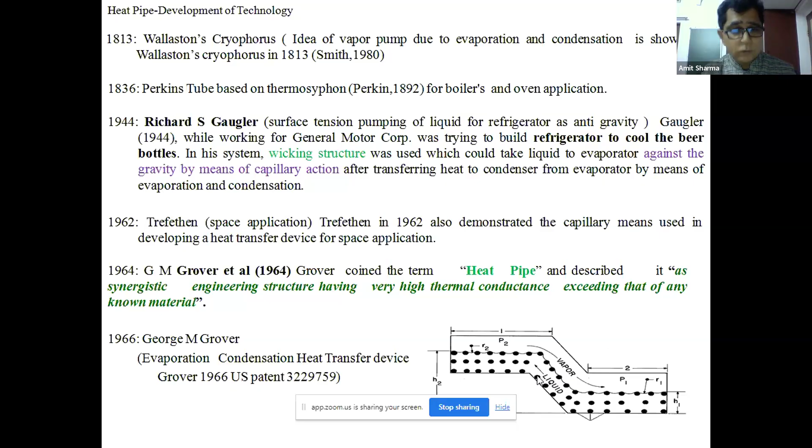So what Grover did is explore the passive nature. Why is it called passive? Because we want to transfer the heat. We all know about ACs and refrigerators. Let's take the case of a refrigerator. You cool down things in the refrigerator, your milk, cold water and perishable goods; you take out the heat. It seems that you are extracting heat from a low temperature and injecting it to a high temperature. That's not possible by itself. It is possible only when we supply external work.

What we normally do is switch on the electricity, and electricity runs the compressor. Later in the slides I'll explain these things in detail, because we talk of air conditioning of vehicles and households. So in refrigerators we are running the compressor by means of electricity. But here heat is transferred without using external work. That is why it is called passive, because an evaporation condensation technique is used, happening in a sealed container.

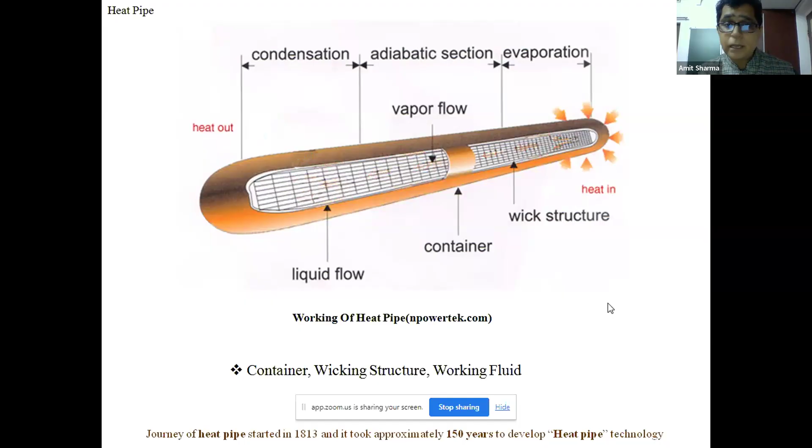So we can say that the journey of the heat pipe started in 1813, and it took approximately 150 years to develop heat pipe technology. After that, it was taken up by all the industry. The reason why is summarized in these properties. It has a large operating temperature range. Heat pipes are available of many kinds, with working fluids ranging from water to liquid metals. Liquid metals are used in nuclear power plants to transfer heat.

Then it has a large heat transfer capability with a minimum temperature gradient. Why is it so? Because heat is transferred by means of evaporation and condensation, which have a huge heat transfer coefficient, so it has almost a constant temperature. Different geometries are possible. Suppose you have a source with a circular or symmetrical shape; you just change the shape of the evaporator to match the source, so different geometries are possible.

Thermal diode: it only allows heat in one direction. The biggest example is the thermosiphon. You transfer the heat from one end to the other, and the liquid goes back to the initial state by means of gravity. So if you reverse it, it won't work. So it's a kind of thermal diode. It's a passive element, so no external work is required, no moving parts, maintenance free, with long life and flexibility in construction.

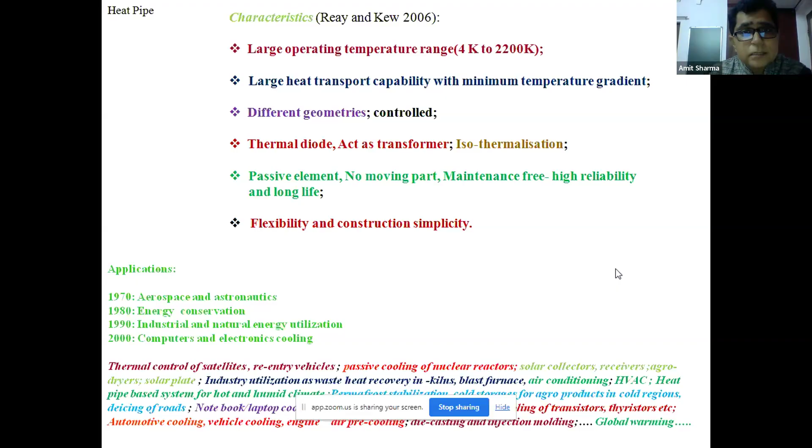You must have heard about the Trans-Alaska pipeline. They stabilize the permafrost by putting heat pipes in the ground so that it remains at the same temperature for longer periods. It's still working. Also cold storage for agro products in cold regions, de-icing of roads, laptop cooling, transistors, thyristors, automotive cooling, die casting, injection molding, and even global warming. Let's see how. Let us start the system.

So now we are actually heading towards the HVAC applications. I'm starting this lecture with comfort since I'm working on comfort air conditioning. If I had been a participant hearing people talk about MATLAB simulations, power trains and analysis, I would scratch my head.

So let us start with things which give us comfort. What is air conditioning? We all know about air conditioning, even a small child knows it. But since we are technical people, we try to justify how heat pipes are used here. Before embarking on air conditioning used in buildings, automobiles, maybe electric vehicles, let's start briefly on the nitty-gritties of air conditioning.

In this air conditioning system, basically we have four components: an evaporator, a compressor, a condenser, and an expansion valve. In the evaporator, we have a working fluid called a refrigerant.

This refrigerant, coming from the expansion valve, encounters the outer region. Let us assume we are working on a refrigerator - some ice is being made, or milk or a water bottle is being cooled. It takes heat from there. We fill the refrigerant at some low pressure, it takes the heat, and becomes vapor at low pressure. This low pressure refrigerant goes to the compressor.

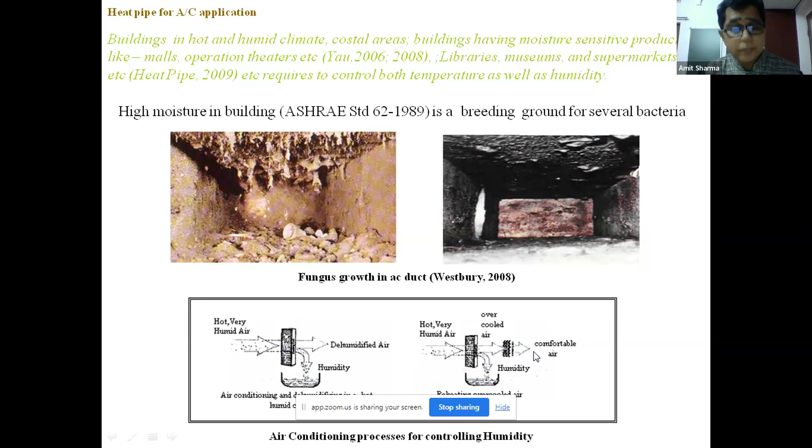The heating has to be done so that the temperature is raised, and the RH should be lowered, and the air which is coming out of it is at a comfortable level. This is shown here.

In this diagram, what's happening? Air at point one is coming from the atmosphere. It goes to the cooling coil, and the two which is coming out of the cooling coil is at a very low temperature and very high RH. So to maintain a comfort temperature, we have to do reheating, and reheating is done by means of electricity, which is a high grade energy. So we are using energy in two parts.

If we are running the cooling coil, means we have a compressor which is connected with the cooling coil, which was seen in a VCR cycle, that's called vapor compression refrigeration cycle. And then we have heating that is done by means of again electricity or gas. Both two types of system, energy are the high grade energy.

ASHRAE, that is American Society of Heating, Refrigerating, Air Conditioning Engineers, prohibited using higher energy after the cooling coil. Means you're using energy, first cooling down, and then you again reheat. They stop that, we don't want that thing. So how can this be done? This can be done by means of employing a heat pipe.

In this diagram, the right hand side diagram, there we have a U shape. Air which is coming out at one stage goes to the heat pipe heat exchanger. What it does, the incoming air is actually hot air, it takes the heat from air side, lowers down the temperature of the incoming air. This low temperature air goes to the evaporator coil, and the evaporator coil cools it down. So now since the evaporator coil is facing low temperature air, it does less work.

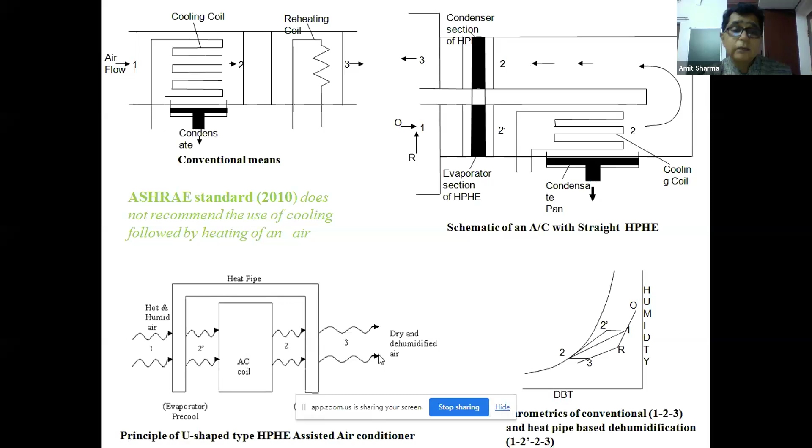We're not employing any kind of external work. So in this way, passively, the heat pipe heat exchanger could remove the electricity part, and we have a system which can decrease the RH and increase the temperature at a comfortable level.

This is shown in the schematic diagram, the same thing shown here. This is a U-shaped heat pipe heat exchanger, this is the cooling coil, this is linked with the whole system. We have a compressor, condenser.

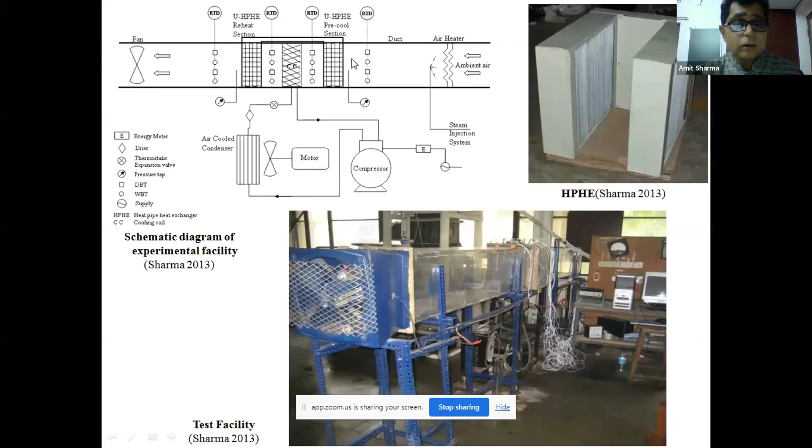This cooling coil is nothing but an evaporator. This is the evaporator, and this is the exchanger basically. This psychrometric chart shows that this is a pre-cool section. Whatever air is coming inside, that evaporator section or pre-cool section of the heat pipe takes the heat.

Then we have a cooling coil. It lowers down the temperature and increases the RH. Then we have to reheat again in a reheat section, and 3 is the delivery point.

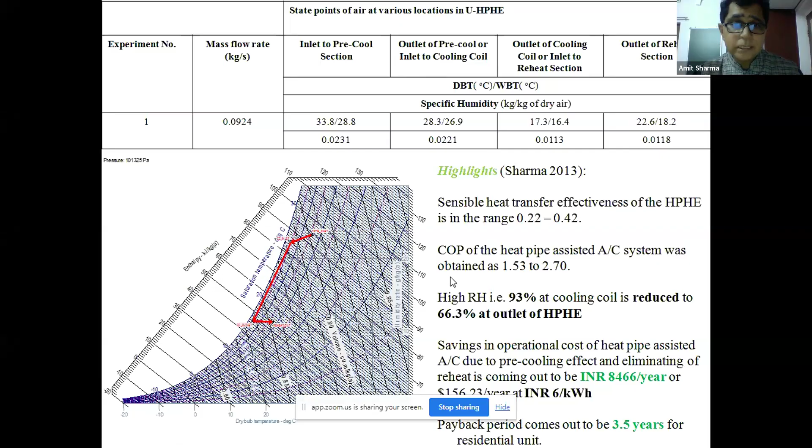The whole system works passively, and this kind of system is very useful in conditions where a lot of humidity is there. So all the major Gulf countries have this kind of system employed to maintain the humidity.

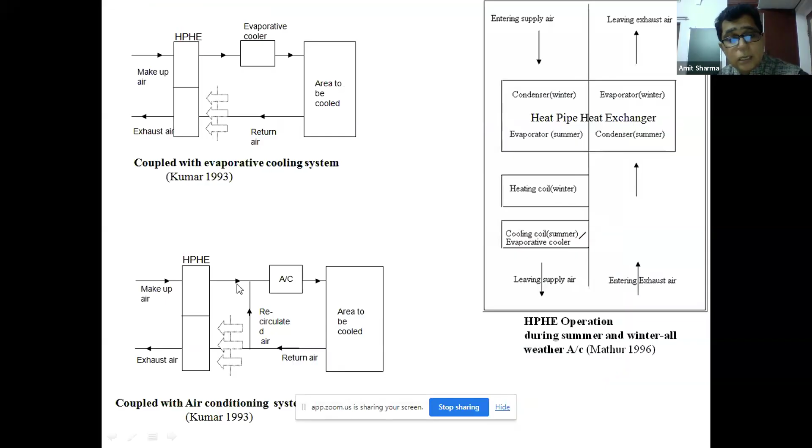So after explaining all this, we've seen how heat pipe heat exchangers are used in malls, operation theaters, and for hot and humid climates. This could also be used for all normal ACs, as we've seen in these two diagrams. We can also use it in Delhi kind of regions, Haryana kind of regions, because it saves load on the incoming air temperature, so the AC can do further work.

In the same era, air conditioning was used in cars also. There we have a condenser. The four major things remain there: we have an evaporator, we have a condenser, we have a compressor, we have an expansion valve.

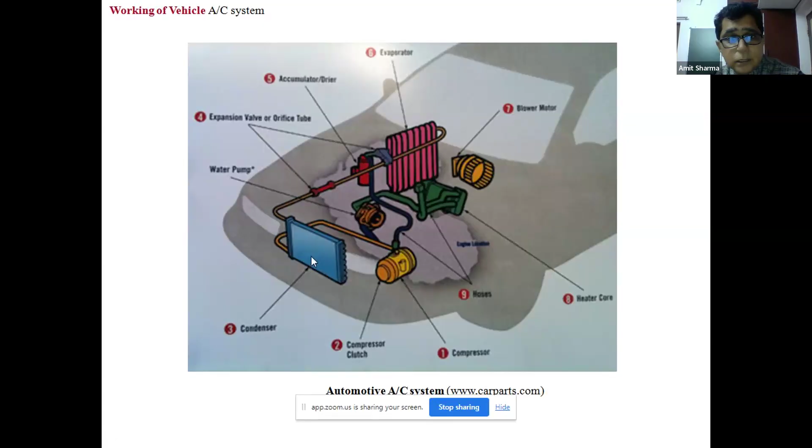But your automobile's air conditioning system does the heating as well as cooling also. Let's see how both are done. This is the diagram which shows how cooling and heating is possible. This is the conventional automobile that runs on gasoline. We'll come to the electric vehicles also, the electric part.

Now in winters, what's happening? This red portion, the coolant which is being cooled for the radiators, that is being used. The refrigeration is shut off, and then that coolant is sent to this heater part, and it is separate, and the air is thrown by the blower, heated up and goes to the cabin of the car.

Now, why am I explaining these things? I'm explaining that the electric vehicle, the recent trend, is now a rage in all regions, India as well as abroad, everywhere. The point is that the technologies which were being developed are actually useful to lay down the path for the new technologies.

Here in this diagram, you see that the red part is the heater, which is for the heating purpose, and the blue part for the cooling purposes. And we've seen the vapor compression cycle, how it is used in air conditioners, and how heat pipe heat exchangers are used in air conditioning systems for energy conservation purposes. Okay, now we see how the same thing could be used for energy conservation, and how this heating and cooling system used in gasoline-based automobiles now paves the path for the electric vehicle air conditioning system.

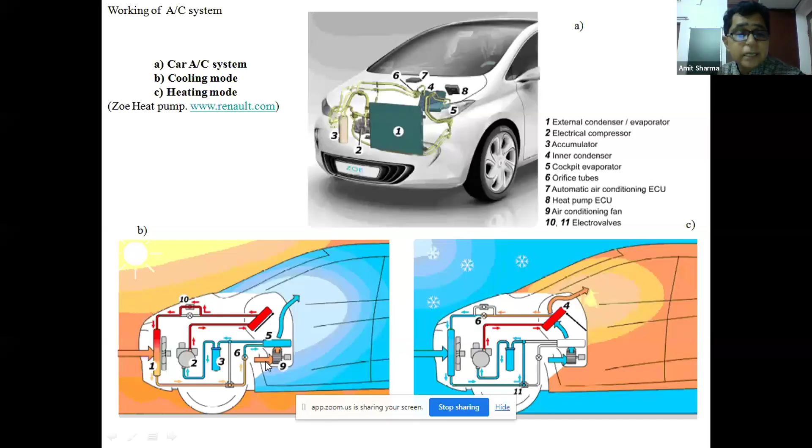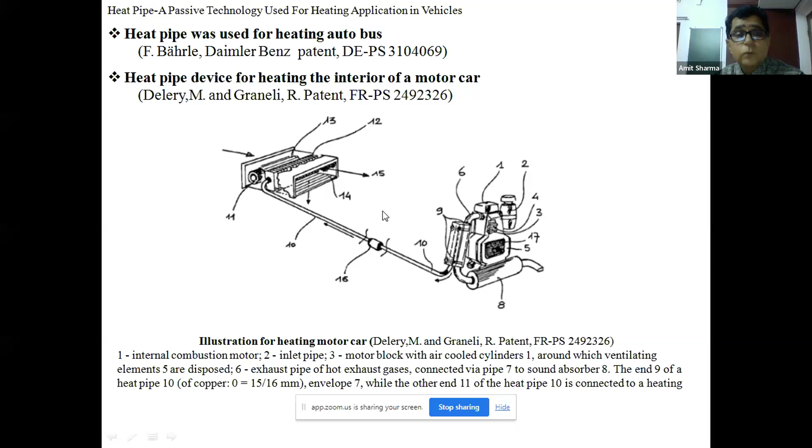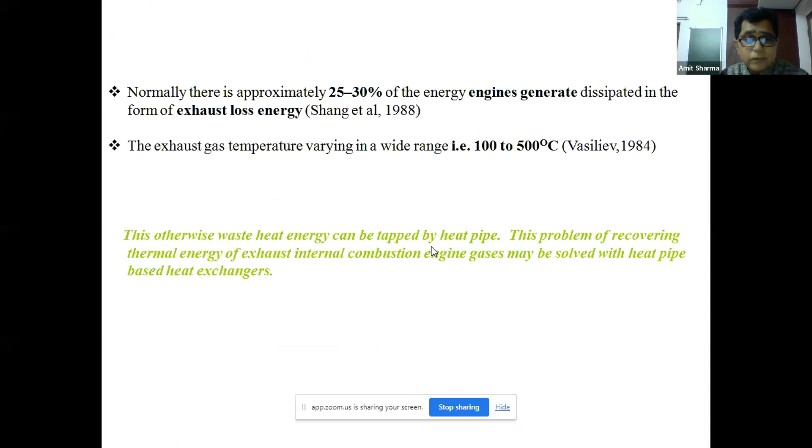Okay. Now this diagram is again taken from the patent. And here, the heat pipe is used to heat up the cabin, basically in low temperature regions where your vehicle is operating. It takes the heat from the engine and carries it somewhat backside, and then there's a fan there that heats the air and throws it to the cabin. This is how the heat pipe is used in buses as well as motor cars. Normally, 25 to 30% of the engine's energy is dissipated to the atmosphere in the form of exhaust loss. The whole idea is to use that energy for heating the cabin by using the heat pipe.

This is the diagram of an exchanger where, again, it could be used to understand the concept, but this is also used for air preheating in power plants. In boilers, we normally heat up the incoming air, so that if we send the heated air, we can reduce the fuel. And the same thing in automobiles also. We have an exchanger, we have fresh air, and then we have engine exhaust. After exchanging the heat, the incoming air becomes hot and we send it to the cabin.

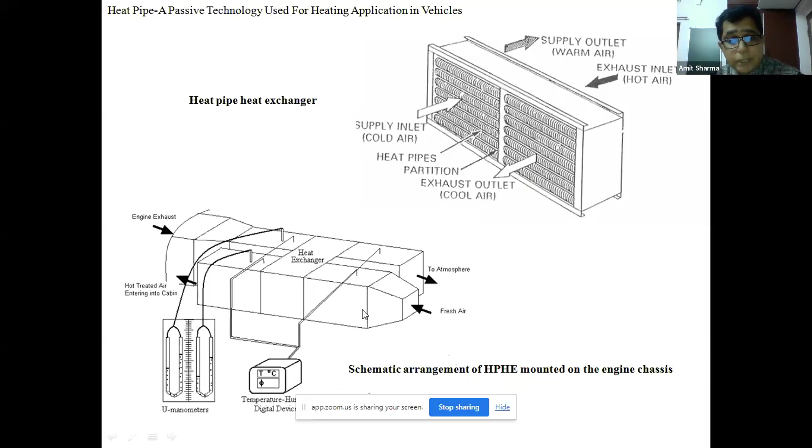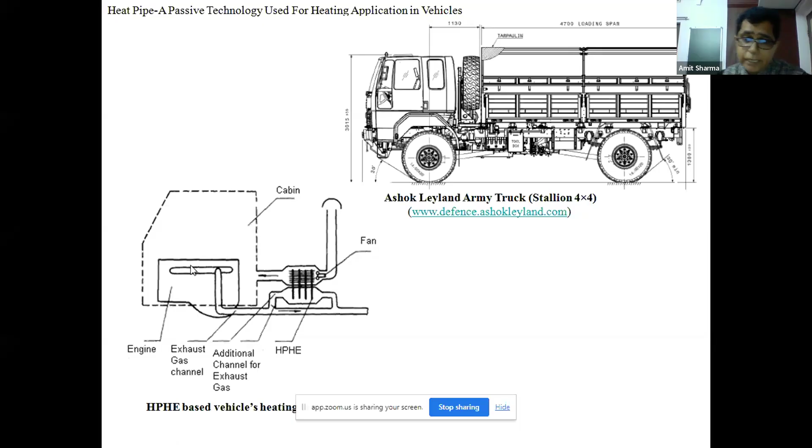This diagram shows a truck where incoming fresh air is coming from here. This is the heat pipe heat exchanger, and engine exhaust, which is at high temperature. It is an exchanger. It takes the heat from engine exhaust. It heats the fresh incoming air. It goes to the cabin and heats up the cabin. This is normally the application in cold regions just like Canada. They have electric heaters, but they also have heat pipe heat exchangers working along with them to heat up the cabin.

Now, up till now we have seen that heat pipe heat exchangers are used predominantly to use the waste heat for residential air conditioning, and to use the waste heat to heat up the cabin in cars. And these heat pipe heat exchangers or heat pipe systems could be used in automobiles in a big way.

It can cool down the power electronics. Battery could be cooled. Later on, we see that in electric vehicles also heat pipes are being used. Fuel cell cooling, dashboard, engine cooling, and the headlamps. Headlamps also cooled. So in some major big segments of the car, the heat pipes are being used

in various areas. Some studies show the heat pipe cooling effect on an instrument panel. Suppose we cool down the instrument panel, the windshield temperature reduces by 9 to 12 degrees Celsius. The cabin air temperature is reduced up to 10 degrees Celsius, and this reduces the vehicle air conditioning load. It can downsize the compressor by 25%. So this improves the vehicle fuel economy, and it can increase the economy by 0.8 to 1.2 miles per

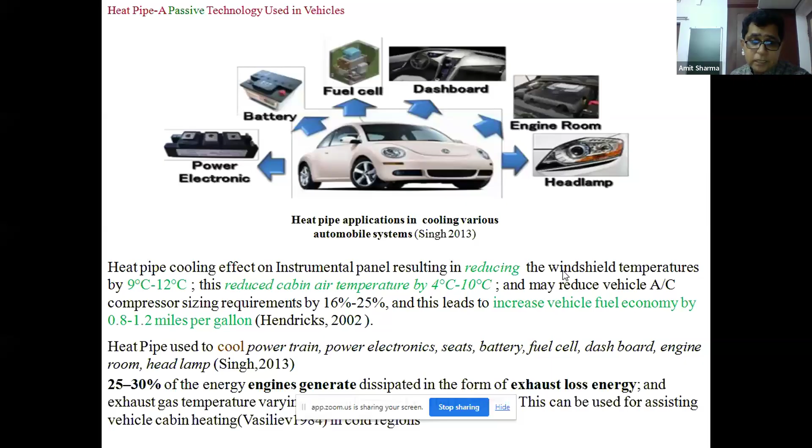gallon. So heat pipes could be used to cool down the powertrain, power electronics. You must have seen the seats also. In seats, they cool down the seats, heat up the seats. Batteries cooling, fuel cell, dashboard, engine room, headlamps. So the energy in gasoline engines that is otherwise wasted, 30% energy wasted in exhaust loss, could be used for heating the cabin.

Now come the electric vehicles. Up till now, whatever I told you, I tried to explain air conditioning, how heat pipes are being used in air conditioners and in automobiles. Now we come to the electric vehicles. The air conditioning part of electric vehicles is, surprisingly, working on a heat pump. What is a heat pump all about? Again, using the same diagram I showed you earlier when I explained the vapor compression refrigeration cycle, I'm explaining the same way.

Here we have an evaporator. If we talk of a refrigerator, this is the area where we cool down the bottles or milk, that kind of stuff. Then we have a compressor, and the condenser, you must have seen in Godrej fridges, they have a black condenser on the backside. One can connect with that. And it rejects the heat. If you go to the backside, you feel hot air. Even in a window air conditioner, if you go to the backside, you feel a hot blast. This is the condenser, and then we have the expansion valve.

Now, what is a heat pump? A heat pump is a system where if we want cooling, it can do the cooling. If I want heating, it can do the heating. I'm explaining what heating does because I already explained the cooling part. This is the evaporator. In the air conditioning or refrigerator part, the evaporator is facing the room or enclosure which is to be cooled. Now in a heat pump, the condenser part is facing where we want to reject the heat.

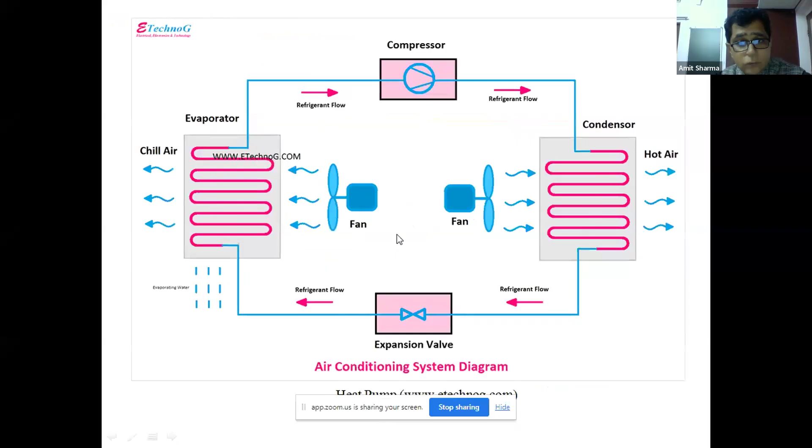Okay. Now in the heating mode, we just switch on the four-way valve. It reverses the refrigerant flow, and then this becomes the condenser and starts heating the cabin. Okay, so this is how the cabin is done.

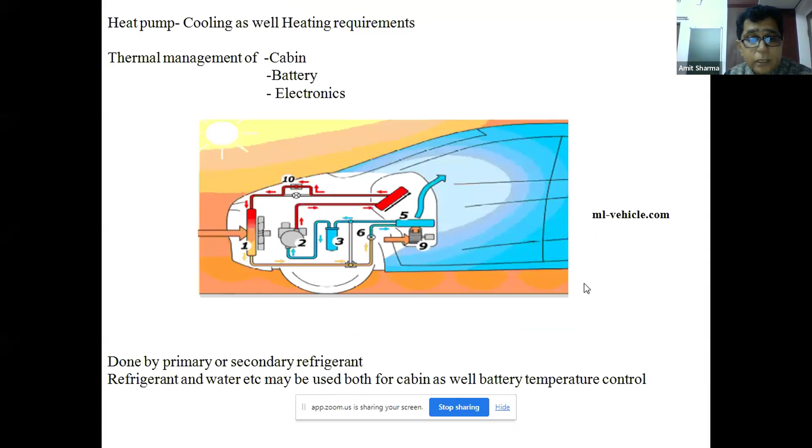The battery cooling can be done by using a primary refrigerant or secondary refrigerant. The refrigerant flowing inside the circuit of evaporator, condenser, compressor, expansion valve is called the primary refrigerant. It cools down the water, and that water flows to the battery circuit that cools down the battery, and the refrigerant may be used for the battery as well as the cabin.

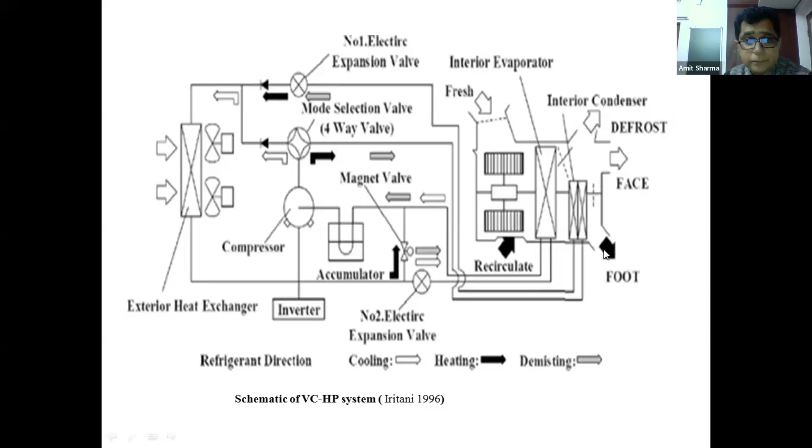Now, since the heat pump is working on a vapor compression refrigerant cycle, it is based on a refrigerant, and luckily our electric vehicles are employing the latest refrigerants, which have very low global warming potential. You know that ozone depletion and global warming are huge buzzwords. So now it has been seen that

R1234YF, whose global warming potential is 4, very low, but it has issues with flammability, but people are taking care of it. 152A, whose global warming potential is 124, is being used. R290 means propane, global warming potential 3, is being used. R600A is called isobutane. Its global warming potential is also 3, and it is also being used. There are several others also, combinations also. Okay, but these are some, I got it from the literature.

And other systems are also used for the air conditioning of electric vehicles: vapor absorption. Surprisingly, I came to know that vapor absorption systems are being used. Actually, in vapor compression we have a refrigerant which vaporizes and then condenses, and we put in external work. In vapor absorption, normally we take the exhaust heat of, let's say, a gasoline engine or some diesel gen sets, but in this case we're using the heat generated from the batteries. That could be used to run the vapor absorption system that cools down the battery as well as the cooling of the system. But it is still in an incipient stage.

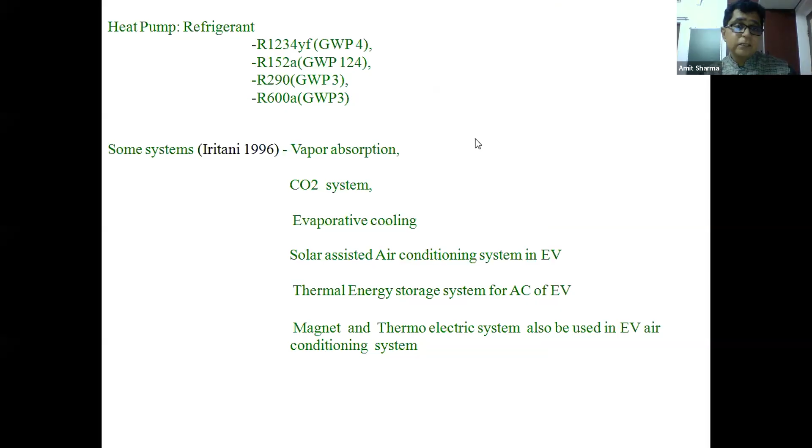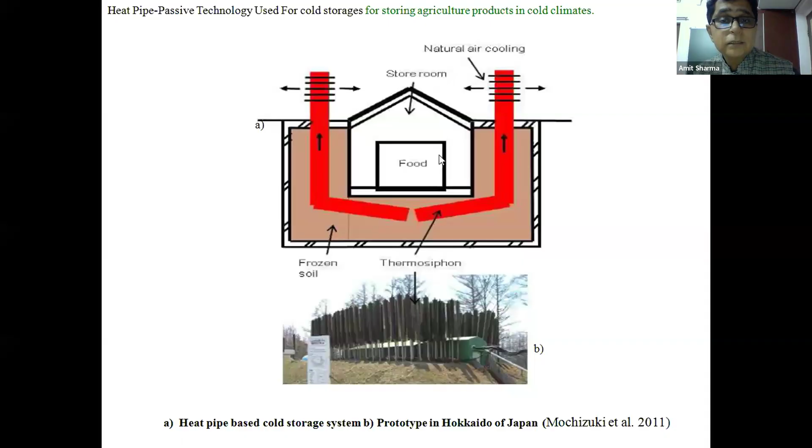Starting from just satellite applications, then it's taken up by nuclear reactors, then energy conservation in HVAC in a big way, power plants, and automobiles are not separate. Now, because electric vehicles are more or less some kind of computers, you have to cool down things. To cool down things, heat pipes are used cooling the laptops, your phones.

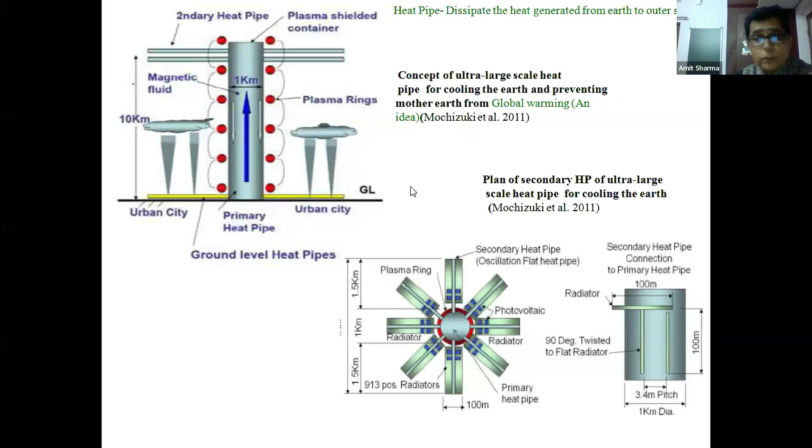Okay, so heat pipes and heat exchangers are being used all over; it's a very practical thing, and people are still working on it. Heat pipes are being used in a very big way in battery cooling. When I was collecting information, I've seen that heat pipes are used in battery cooling. So in a nutshell, as I worked on a heat pipe, a heat pipe is a thing which could be applicable to all walks of life, all over the industries, in a very big way. And that's how I come to the end of this lecture.

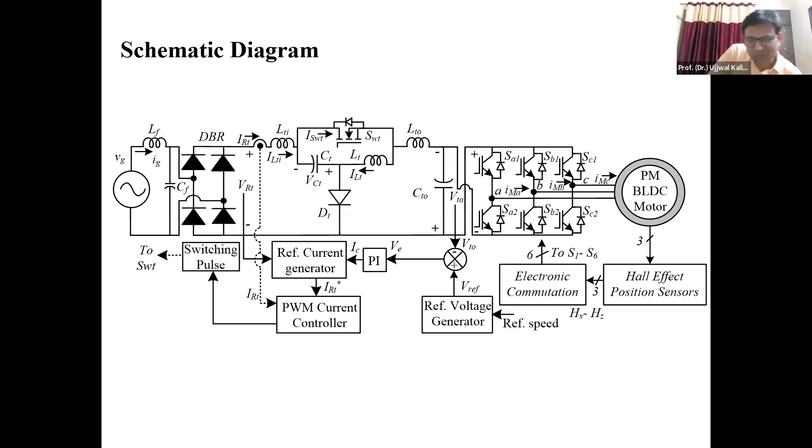Any other questions from the participants please? If you have any problem in your industry related to analog control, digital control, EVs, motors in electrical engineering, power electronics, you can ask any question. If you have any problem in real-time implementation of any system, you can ask me. I spent almost 15 years of my life in the laboratory.

So one question is from Mr. Rangaraj. How can we... pardon? Algorithms? How can we optimize battery life in low... no, advanced... actually your voice is not clear.

Is it audible now sir? Yeah, now it's audible. Now, how can we optimize battery life in low power EVs through advanced BMS algorithms? Advanced BMS, battery management system algorithm - please repeat again, your voice is getting cut. Okay, just repeat again.

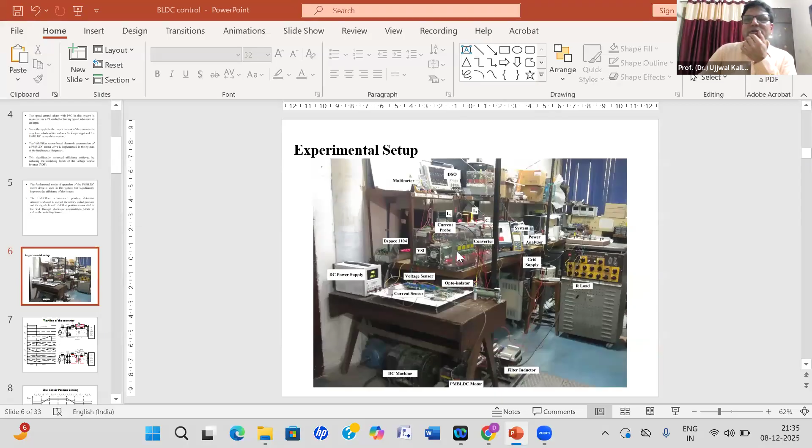Approximate cost, I just want to know. The cost mainly depends on the rating of these components.

So in case you require a 30 or 40 kilowatt inverter, that will cost almost 1.5 lakh rupees. This DC-DC converter will cost almost 10 to 15,000 rupees. This DBR will cost almost 2,000 rupees for 30-40 ampere. And the PMBLDC motor will cost almost 20-30,000 rupees, maybe sometimes 50,000, depending on the vendor.

Hall sensors are inbuilt in that motor. Sir, the inverter you have used here, is it a multi-level inverter or a normal inverter? No, normal VSI inverter. We never use multi-level inverters in drives, because multi-level inverters are only used where we need to operate the system at very high voltages.

Okay, fine sir, thank you so much. Yeah, any other? Anyone else? Sir? Yeah, please.

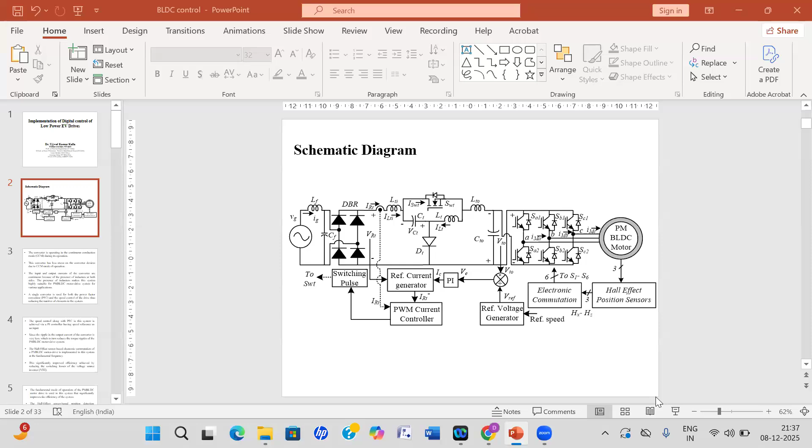This is Ashutosh Bist from SVSU. You have said that you can apply a controller with respect to PI, so basically we can go to advanced level controllers, definitely, like sliding mode or backstepping, but you are still stuck with PI and not using the derivative part.

So basically, I can just, well, either it is a suggestion or something - we can, because in commercial applications we generally use PID control as an overall package. With the derivative component we can use an active low pass filter, because derivative helps in controlling the overshoot, be it through any uncertainties that may arise.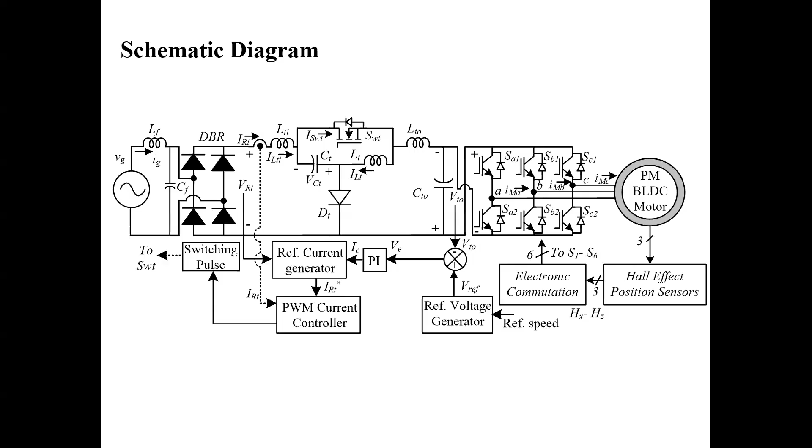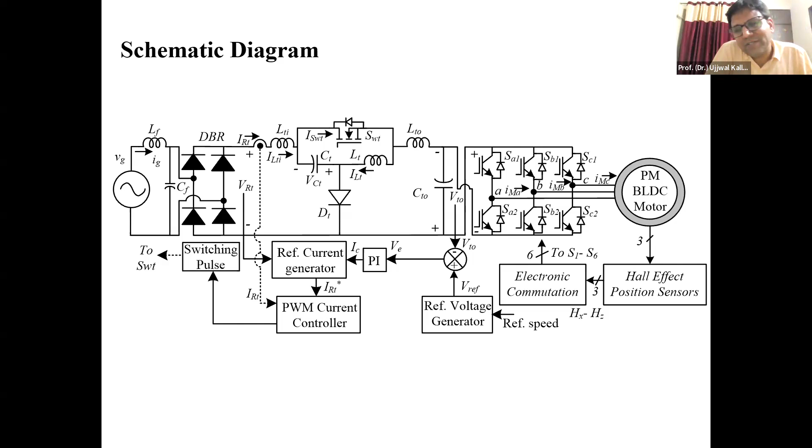If not using derivative control, how do you plan to control that? No, see, once your controller is tuned with any system, even if you change the value of KP, KI, it will not affect the system unless some dynamic situation arises. Are you getting the point? If yes, I will show you by tuning my system.

Dr. Preeti, can you give me some time, for 5 minutes? Yes, sir, please, sir.

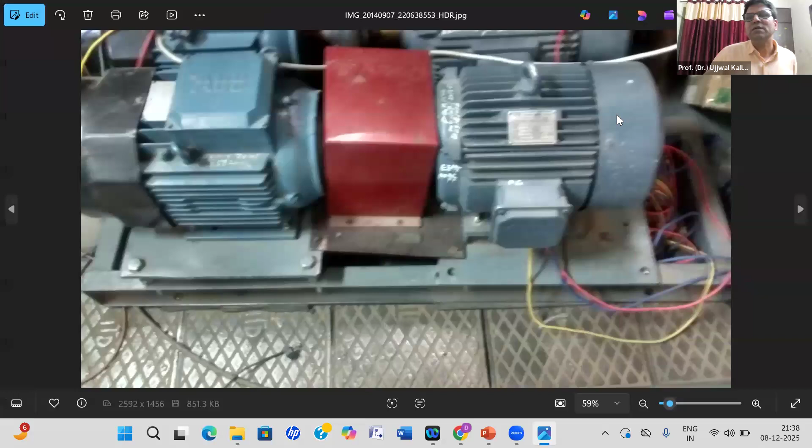See, I have one video of this digital control that I implemented. Are you able to see my screen? Yes, sir. This video is not running. I'm confused.

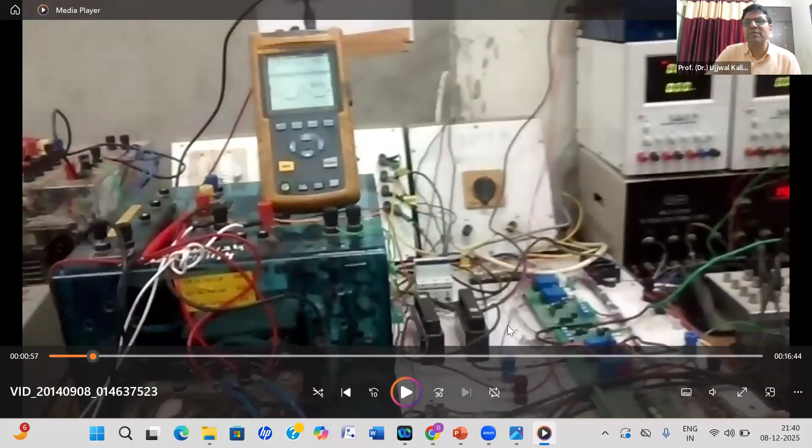These are the rectifiers. This is a sensor board - this is the voltage sensor, this is the current sensor board. This is the inverter.

This is the control panel of the DSP controller, and these sliders are for adjustment of the KP and KI. Am I audible?

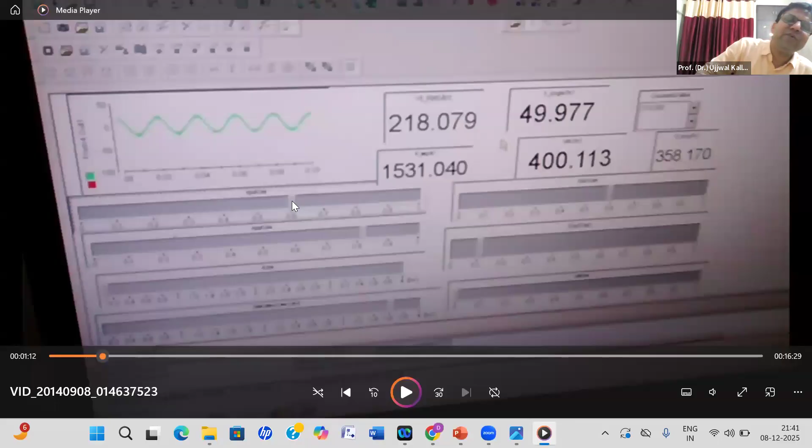Once my system is tuned, even if I vary the value of these KP, KI, that will not affect my system unless and until a sudden, large dynamic change occurs at the load side. My system will not change.

That is what I was asking, sir - for any uncertainties, how do you plan for that? What is the backup plan for uncertainty arising in any kind of situation?

Listen, for any type of uncertainty, even if you change from 0% to 100% or 100% to 0%, the PI controller will take care of it. You don't require derivative control. By using the derivative controller, you are unnecessarily creating trouble for your system. That's not required. I implemented almost 500 controllers.

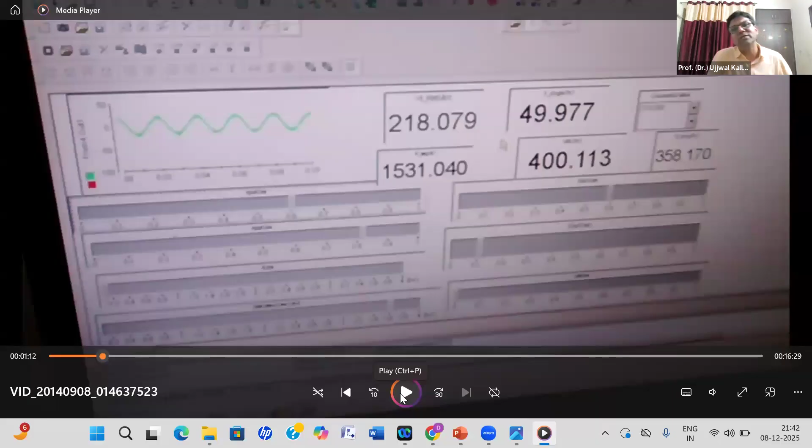I had 27 patents in this area, and I have published more than 17 transactions in this area. I implemented all these schemes in analog as well as digital, both. Are you getting the point? So the PI controller is more than sufficient, we don't require derivative. I don't understand why people use derivative controllers - that may create a lot of problems for them.

See, this is the DC link voltage - that is perfectly 400 volts. Frequency is 50 hertz.

Okay. Are you satisfied? Am I audible?

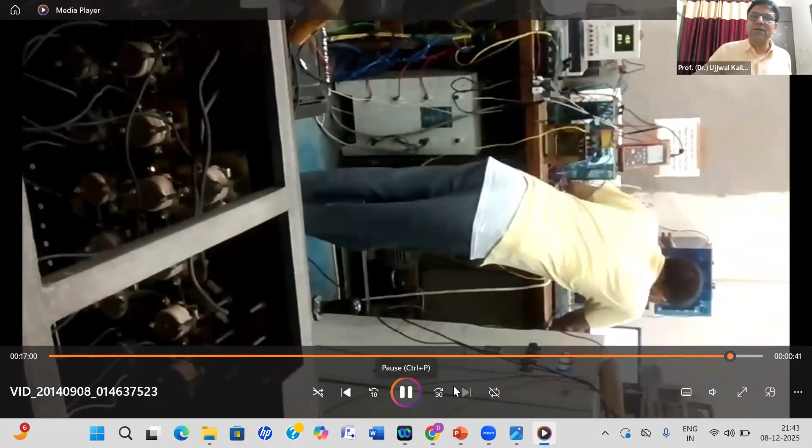Dr. Preeti? There is some signal problem, I think so. Sir, please the video. Now it is okay, sir. Okay. Please.